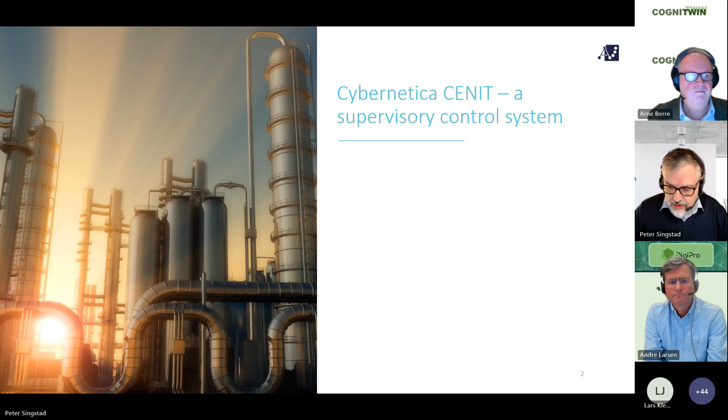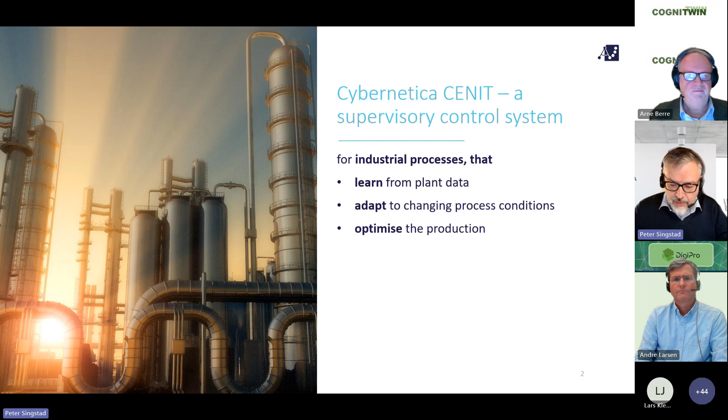Let me first talk a little bit about our main product at Cybernetica, which is Cybernetica CENIT, a supervisory control system for industrial processes that has the ability to learn from plant data, has the ability to adapt to changing process conditions and optimize the production. And we should do that in a safe way always.

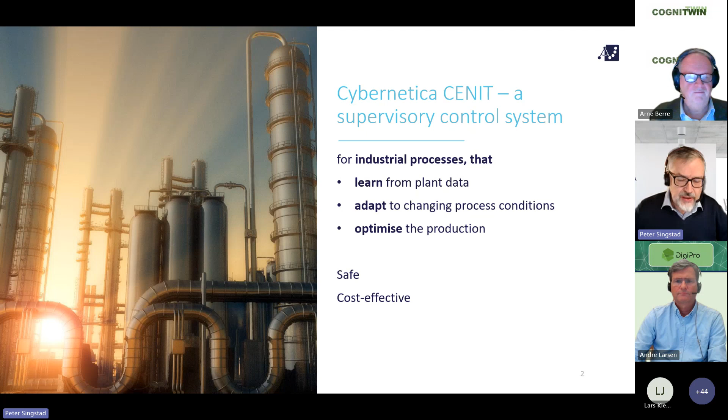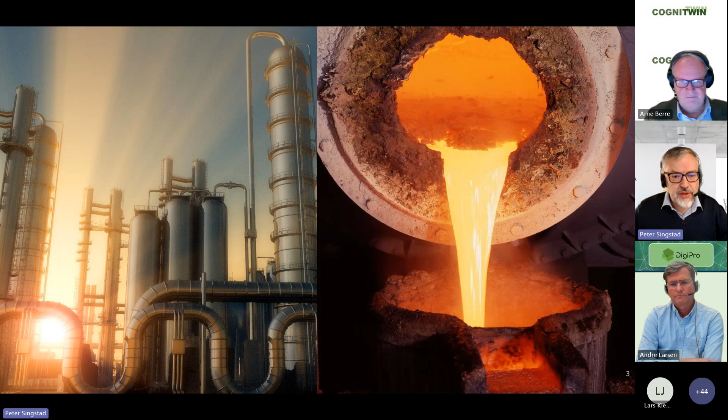It should also be cost effective, so that we can make a business case out of any new controls that we make, including the ones in COGNITWIN. In the end, it should be cost effective. So we do that for chemical industry, and for metallurgical industries, as we will focus on today, including aluminium electrolysis.

This Cybernetica CENIT tool is based on what in science is called nonlinear model predictive control. It's also based on first principle process models, which means that when we start working on a new case, we start with making a model of mass and energy balances and so on, formulating that model in terms of differential equations. That's the starting point of developing the control structure that we have in mind. So the mathematical model is key here.

Let me find a pointer. That model goes into a number of sub-projects that is used for developing the applications we will talk further about today. On one side, we plug that model into a part of the software which creates what we can call a soft sensor. It's based on an augmented Kalman filter, for those who know the theory here.

It takes the measurements in. It has the ability to correct the model, to track the real plant, and then make predictions. So that part of the system has the ability to learn from the history.

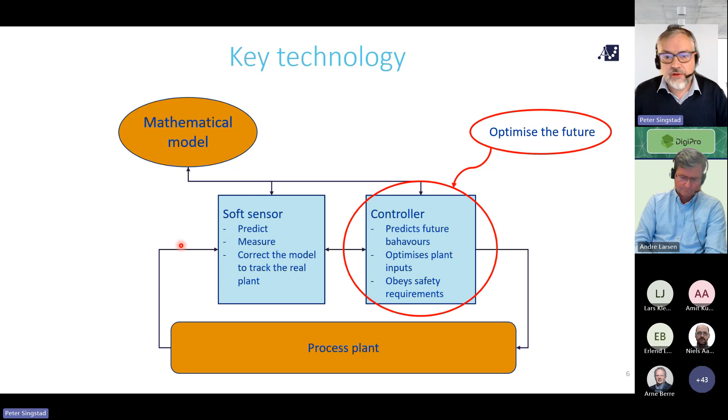This is part of a bigger suite that we will see more on the pipeline diagrams. Let me just briefly mention the workflow that we are working on here. We typically start with developing the model. Then we have a tool for fitting the model to plant data, so we add plant data and we can fit the model.

We can either fit parameters that later on are held constant, or we can also fit parameters that we allow to vary over time, so that we enable this tracking that I mentioned briefly. That can be set up in the model fit tools. Having made a model, we can just make a simulator. We have the Proxim tool for creating simulators that is used in a number of applications in the industry.

But then we have the online control tool, which is Cybernetica CENIT, where the same model can plug into there. Also, in order to test the controller, we have an online simulator that emulates an online system, so that we can run the model in RealSim, and we can set up an environment where the CENIT controller actually controls the RealSim as a plant replacement model.

And that's the final step of testing the system before we really go online. So we turn over that switch and start controlling the real process. Then we have to be at the plant in the end.

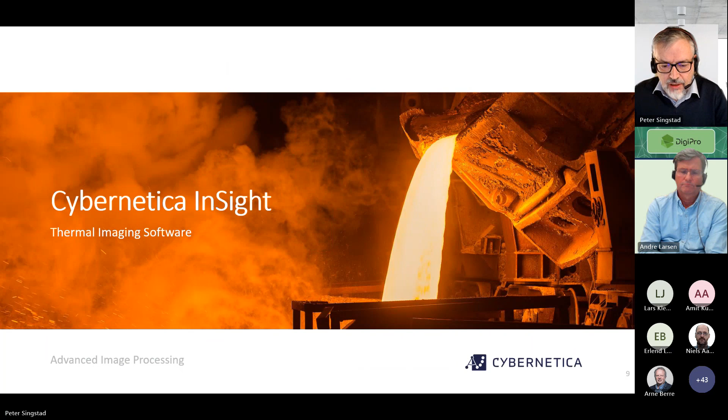Secondly, another tool that I would like to mention briefly is what we call Cybernetica InSight, which is a tool for thermal cameras. It's a very new tool that was launched last year. It has the ability to integrate data from different thermal cameras from different vendors, and we take that into an application host where we collect the data. So this InSight service, I'll talk a bit more about that later on.

And then we have a web server host and an OPC UA client. The InSight service has the ability to have a rather advanced image processing algorithm plugged into it, so that we can take the image data and do tailored algorithms for a particular application, and we will hear more about the Elkem application of that in a few minutes.

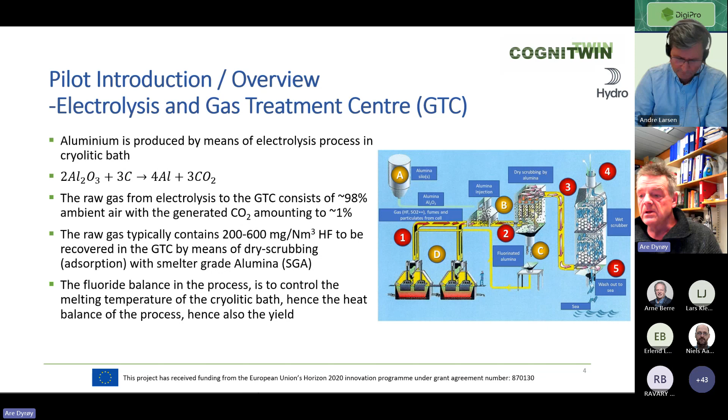This is the system in question: the Karmøy technology pilot, where we have the gas ducts coming from the pots going to the GTC. The gas is collected from the cells and goes through a reactor where it meets the smelter grade alumina, both primary and recirculated, to adsorb the HF.

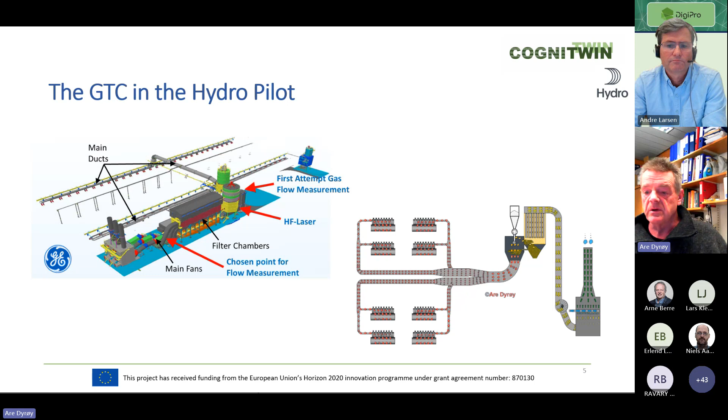Mostly these GTCs work with an efficiency of 99.9 something in terms of recovering the fluoride. The fluoride is a valuable commodity for us, costing $1,700 per ton, so we want to recover as much as possible.

In Hydro, we built this up with 4 cases in the beginning. First, matching the necessary primary alumina feed to the reactor to have a flat and constant fluoride part of the alumina. Second, keeping the reactor temperature within the best area of absorption of HF. Third, regulating the main fans, both to have full control on the gas flow and also to save energy.

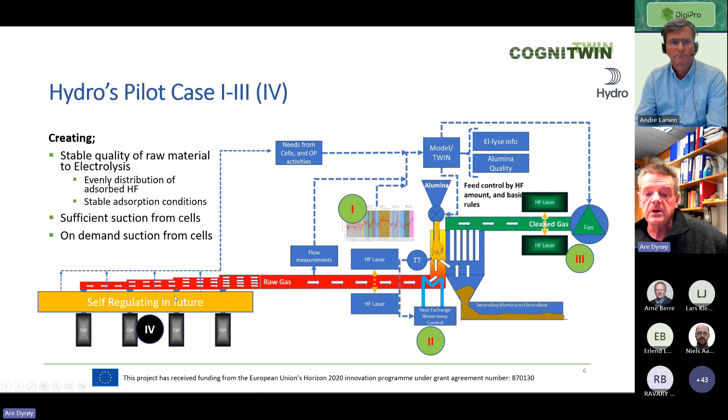We also had a fourth case where we wanted self-regulating dampers on the cell to have constant suction from the cell. However, due to the physical cost of this, it was dismissed from the project. But it is now continued, also in collaboration with Cybernetica, to bind this together, and we are now running this under our CO2 programs in Hydro.

We had targets for each of them: evenly distributed HF absorbed in the alumina fed to the electrolysis, keeping the temperature within 90 plus minus 5 degrees, and reducing the overall power consumption of the GTC main fans in the system.

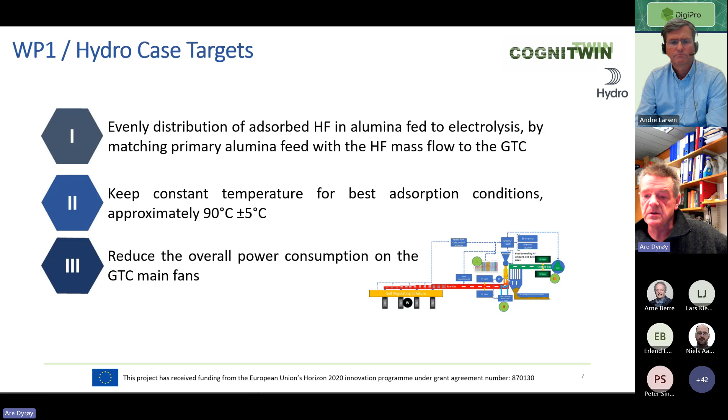I'll just show this since Peter went through it, but we had a big challenge in our system because, as some of you know, Hydro was prone to a cyber attack, I think back in 2018 or 19, which is why we've been very cautious about how different communication pipelines across our firewalls have been done. Everything we do, we try to protect the process network, but we managed to find a secure way to do this based on the knowledge from Cybernetica and our IT personnel in Hydro.

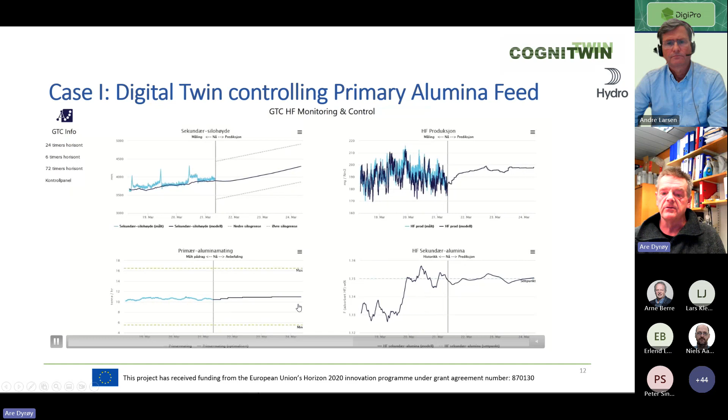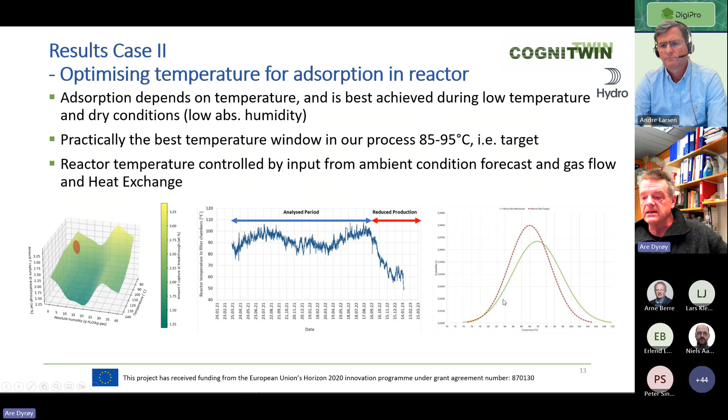We also developed, prior to this but also further within the system, a cheap way to measure high or large duct gas flow by the use of ordinary DP cells with delta pressure cells combined with simulation in CFD, where we get the constants for the system.

And then we had the gas flow control in order to control the main fans, but also as a feedback to the model of how much gas with which concentration gave us the amount of fluoride that we needed to meet with secondary alumina.

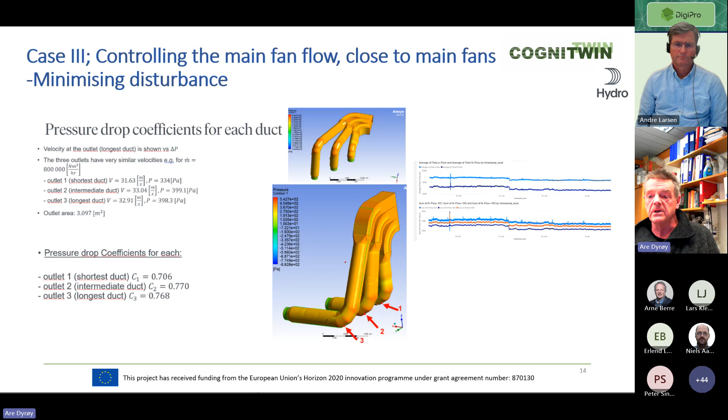And when we look at the control of the main fans, we managed to take down as much as 10% of the use by basically putting the gas flow on a constant mass flow in terms of normal cubic meter per hour.

If calculating the same thing for the whole collection of main fans that we have in Hydro Norway, this would add up to 23 to 33 gigawatt hours per year in terms of saved cost, basically by tuning down the fans during the colder part of the day and only gearing it up during the hotter period of the day.

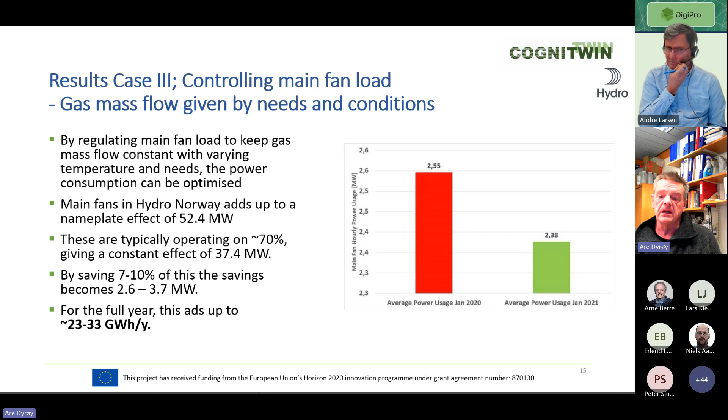We also saw the good effect of having constant temperature in our main reactor of the GTC, and we reduced the power usage as much as up to 10% on the main fans, giving, as I said, 23 to 33 gigawatt hours per year.

Plus, a lot of the bits and pieces that we found in this project, we use as spin-off in other cases and continue to work on in our system. And that was basically it from me.

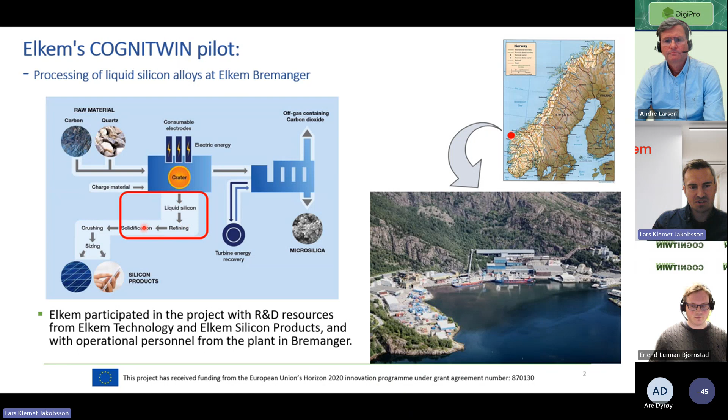So the main focus was to apply infrared cameras to get new information that we didn't have before starting this project, and also to develop online models for the material and energy balance from the tapped metal to the solidified product.

So we had the aim of implementing 3 infrared cameras: one for tapping, one for the refining station, where we also do alloying and fines injection, and finally at the belt casting and solidification. This presentation is focused on the first two.

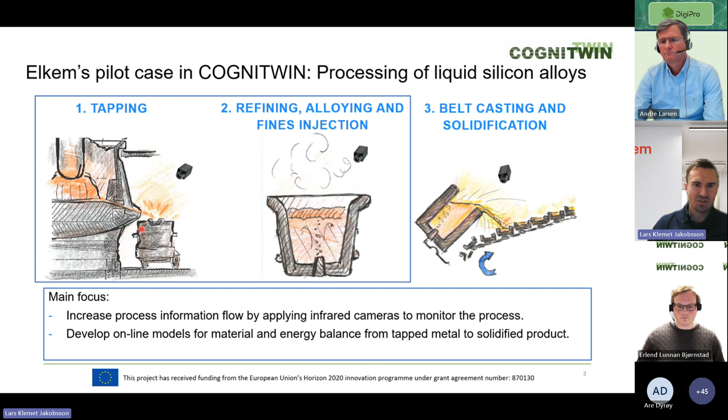So we have already seen the pipeline where Cybernetica have included or implemented their software and their algorithms. And now for this presentation, we will mainly dive into the algorithms worked on for the IR cameras.

So I think I'll give the word to you, Erlend. Yeah.

When you tap from the furnace into the ladle, the temperature is a very important process parameter because it determines essentially what we can do with the liquid in that ladle, how we can refine it and how we can alloy it before we cast it. So this temperature budget is critical.

One of the things we wanted to see if we could measure was the temperature from the tapping jet using this IR camera. One of our issues is that the temperature over the whole tapping jet is not consistent, so you can't just naively point a camera at the jet and get out a reasonable temperature. The tapping jet's shape and size will also change depending on the conditions of the furnace.